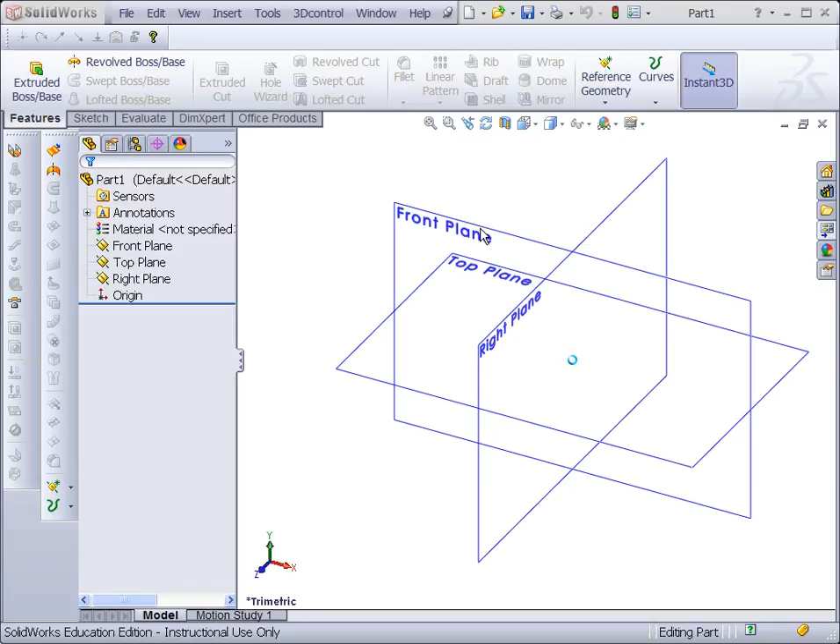In this video, I'm going to go through the process of creating the pressure plate for Lab 7 Sheet 2. We're going to start off by creating the model. I'm going to select the front plane, open an extrude on it. Then we need to draw two concentric circles. One's going to have a 128 millimeter diameter, and then the inner will have a 25 millimeter diameter.

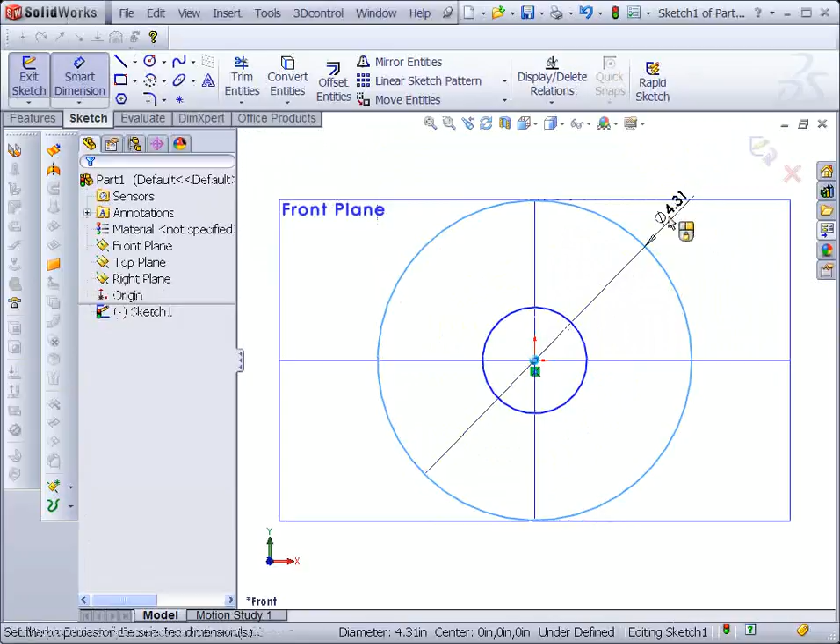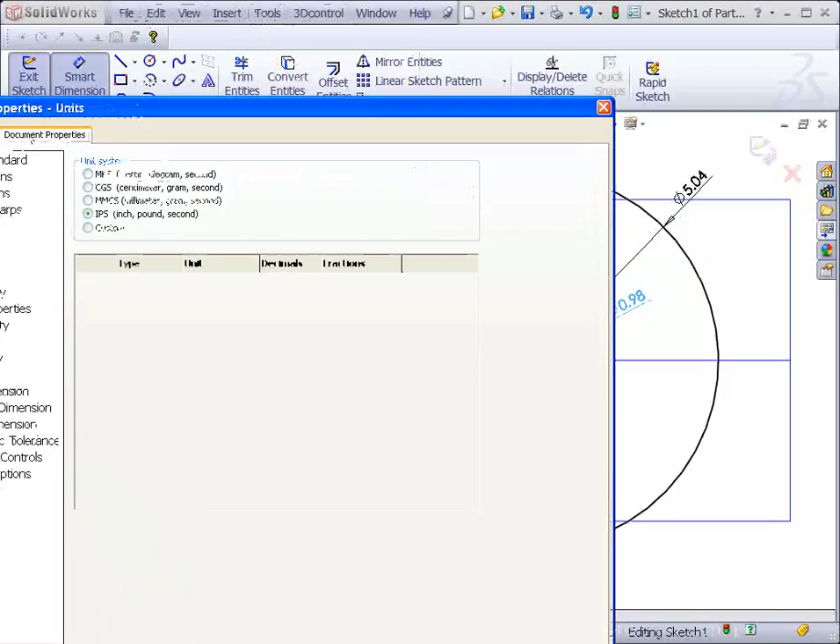So let's select that. Right now it says 4 inches. We're going to type 128 millimeters. Hit enter. This one we're going to do 25 millimeters. If we want to avoid that, we could have selected a metric part to begin with, or select Tools, Options, Document Properties, Units, and switch it over to millimeters.

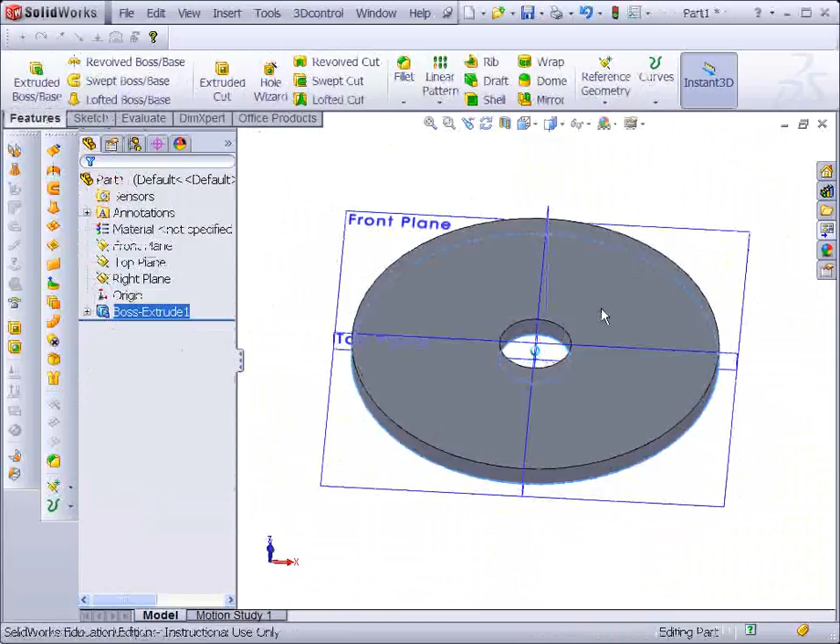So there I have my first part for extrusion. Select Extrude, set that height to 7 millimeters, and notice since I converted it to millimeters, now I'm in millimeters. The next thing I'm going to do is draw the support ridge that goes up through the center of the bosses. That's going to be an extrude. It's going to start on this top surface. Select the circle command again, and I'm going to draw the inner and outer circles respectively.

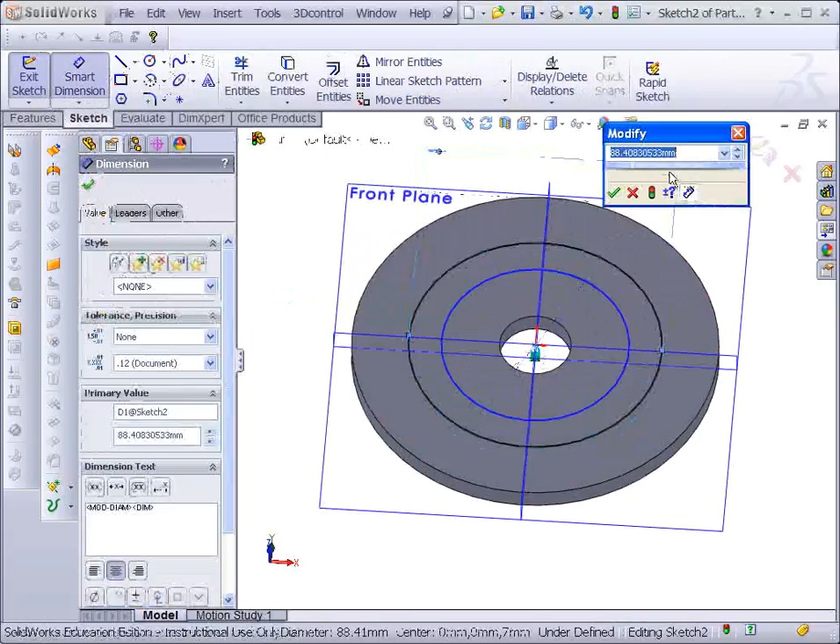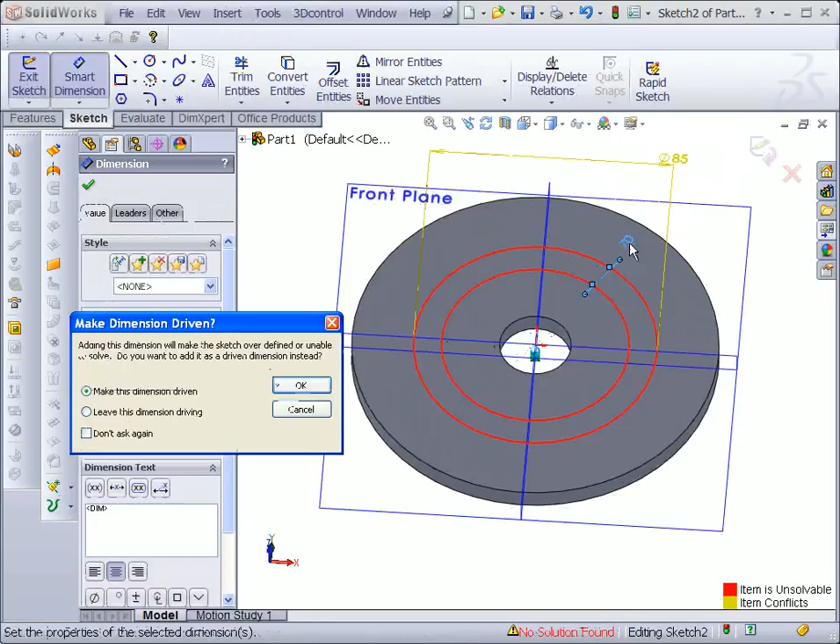If you look at your drawing, the outer one's the easy one. That one is 85 millimeters. The inner one is more difficult because it's given as a thickness, and that can confuse some people because there's also a bolt center dimension on your part. Now there I selected 70, which is incorrect. I'm going to hit cancel there, go back to the Smart Dimension tool again, and set up my distance between the two as 5.

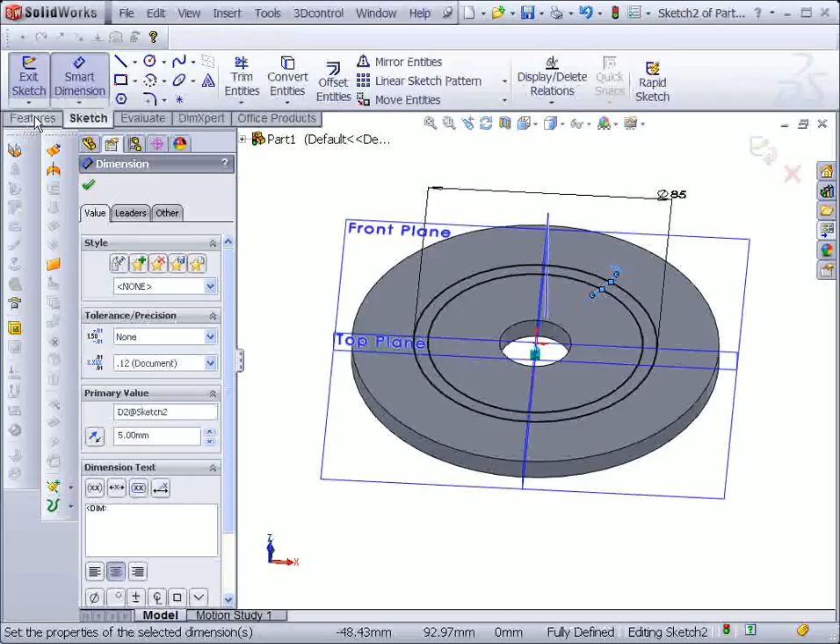That's correct now. If we look at our detail B on the drawing, you're going to see that the total height of this pressure plate is 37 millimeters. We're going to make an extrusion that's 30 millimeters high, since our base plate is already 7 millimeters high. So check OK. We've got that in place now.

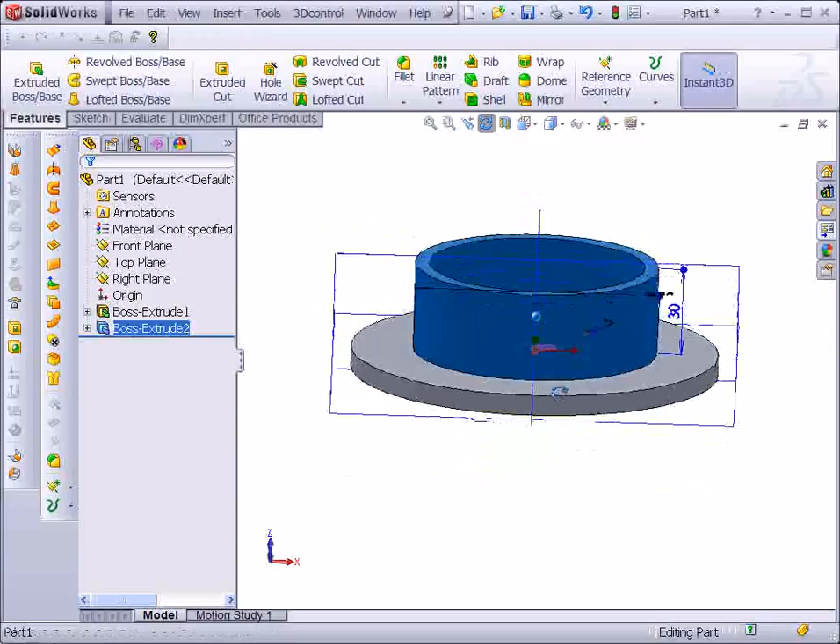That actually should be 12 millimeters. That's an incorrect dimension. So set that to 12. I'll hit the rebuild button. Now that's the correct height. My total bosses are 30 millimeters high.

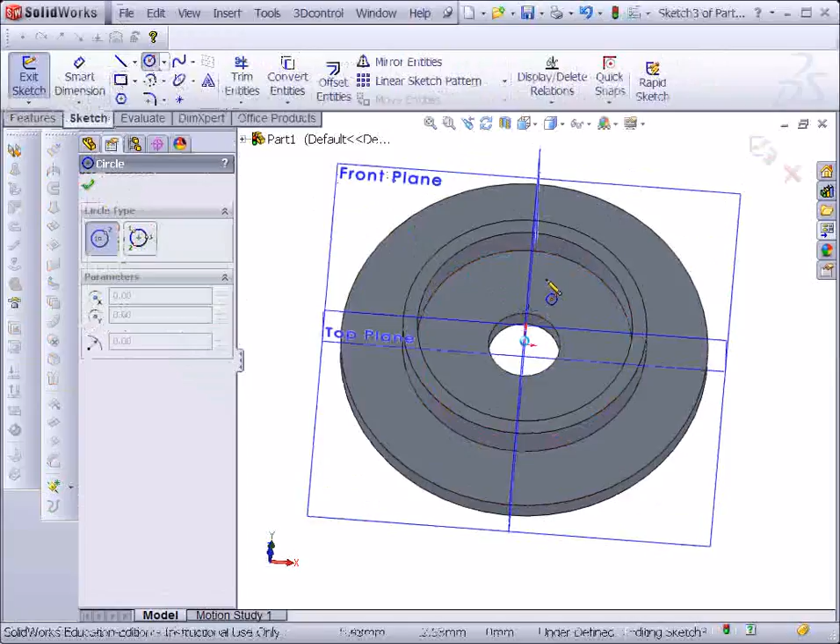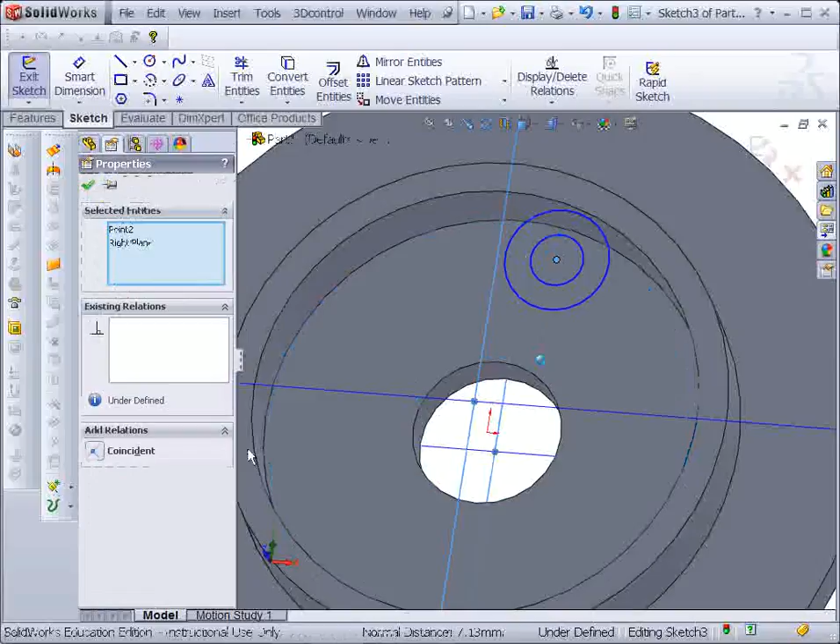Alright, the next thing I'm going to do, I'm going to go get an extrude again, select this face, and draw two concentric circles to represent the spring tower bosses on this pressure plate. I'm going to hit the control key and select the right plane. If you have the arc selected, it will make it tangent. So you want to have the center of the circle selected. Get the right plane selected, select coincident, put on our dimensions.

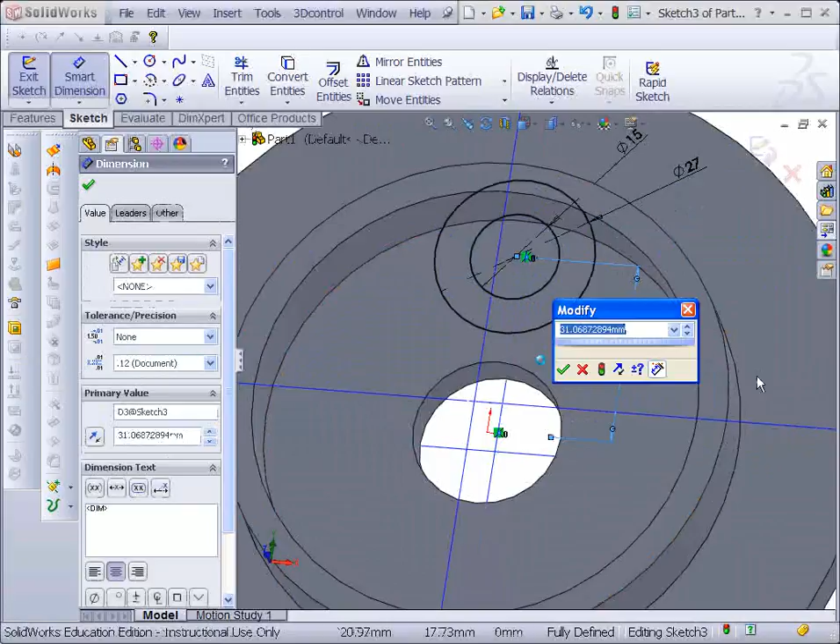Our through-hole dimension is 15, and our outer dimension is 27, and our center off of the plane is going to be half of 70, so that's 35. That gives us our location for our boss. So now that extrusion is going to be 30 millimeters high. So 30 millimeters is already in there. Check OK.

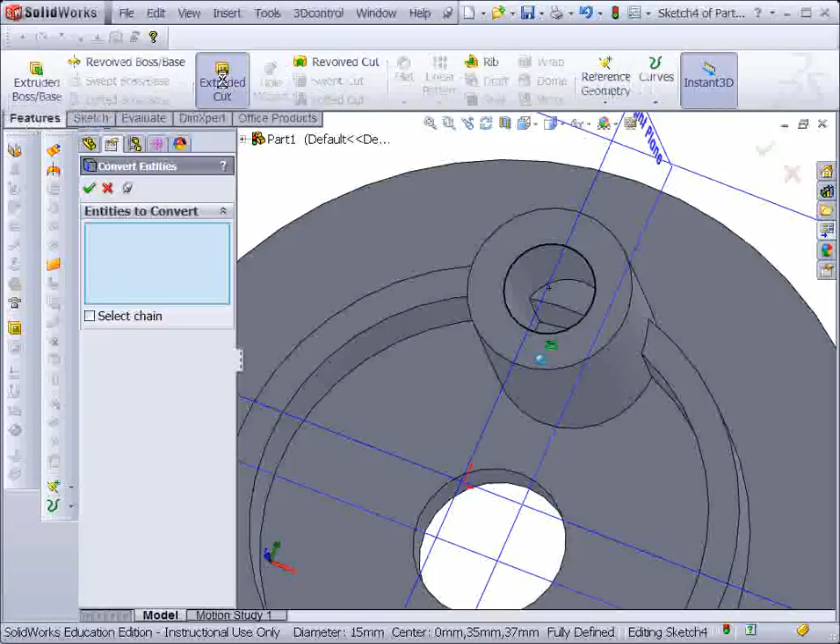Now if you notice, we've got a little bit of the support rim for the spring tower inside there. So I'm going to select the top surface, hit Cut Extrude. I want to use the Convert Entities tool on the inside edge. I'm going to convert that, do an extruded cut, select Through All under Direction 1, and now I've got a cut that goes through everything.

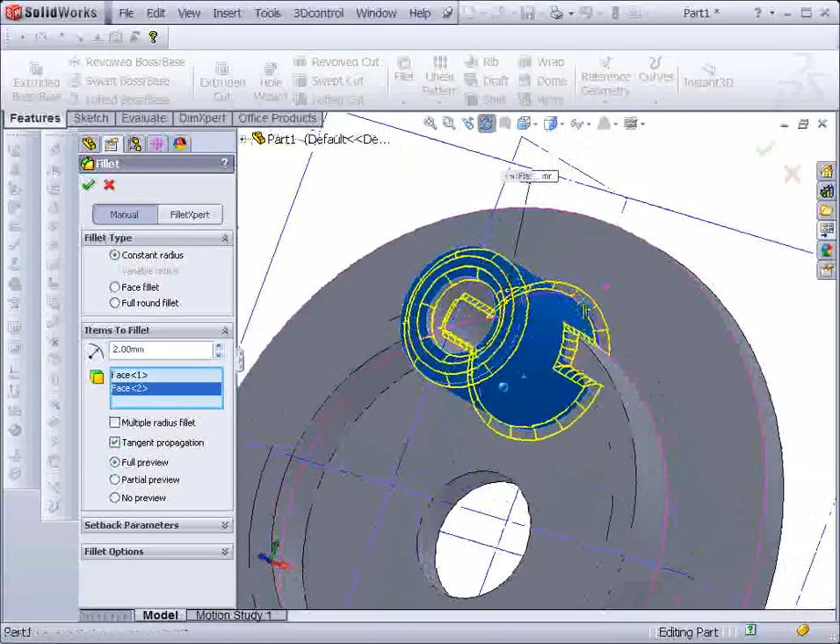The last thing I need to do with this is select the fillet command. I'm going to put a 2 millimeter fillet on the top surface and side surface of that boss. And then I will check OK. I'm also going to put a fillet on the top of this plate here. I'll check OK for that one.

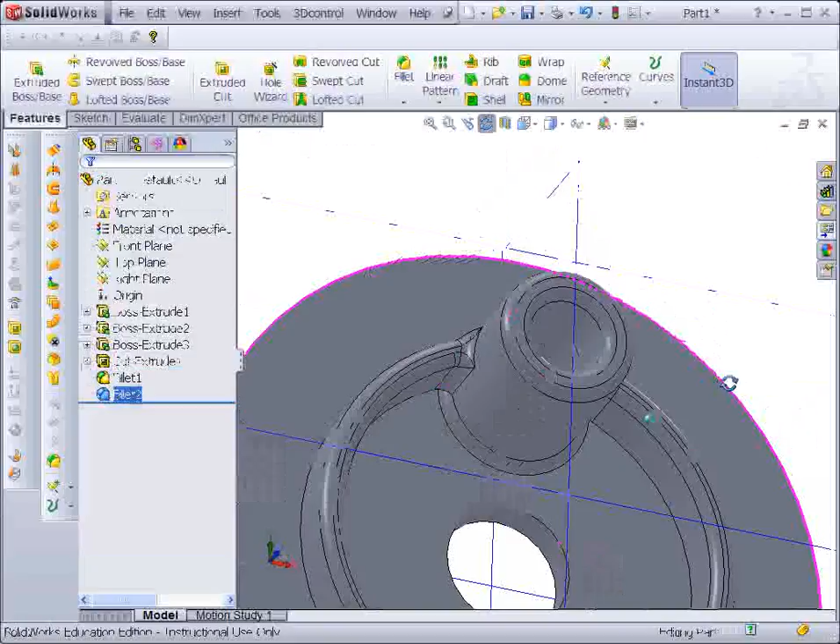Then I'm going to do a circular pattern. So I'm going to select circular pattern on the drop-down menu. I need to turn on my temporary axes. That gives me a center reference for this. I'm going to select equal spacing.

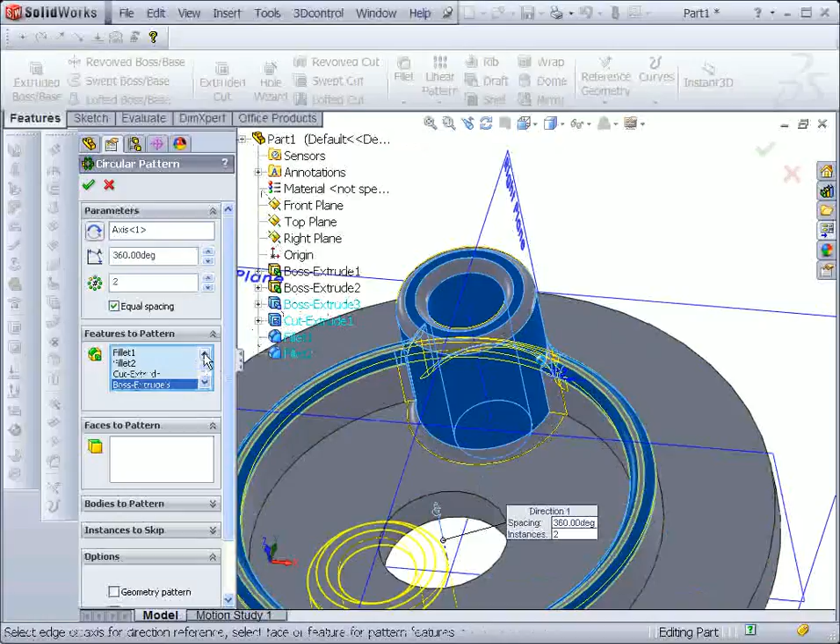In the part drop-down menu, I want to unselect that last fillet. Select the cut and the boss. And fillet 2 should not be part of this. Fillet 2. Then I want 6 of these. I'll check OK.

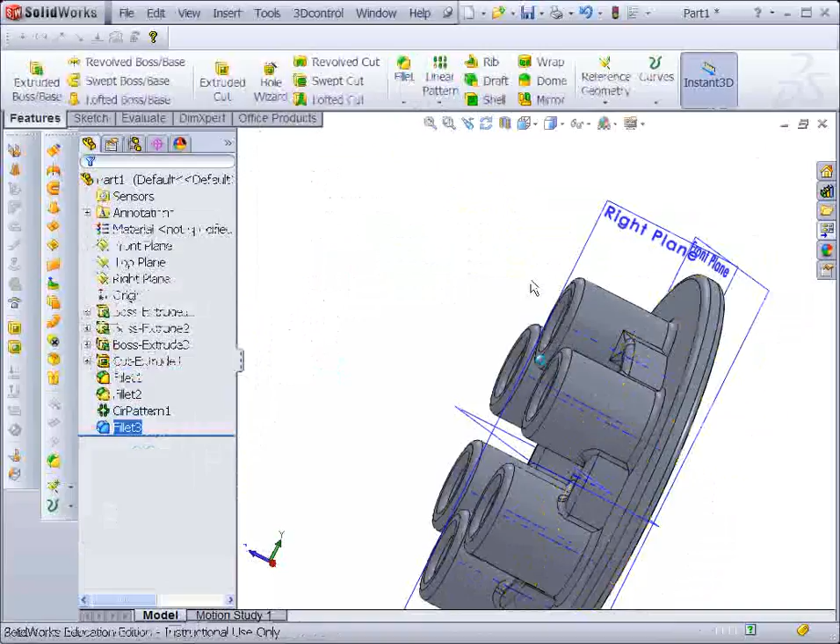And then the last fillets that I have to add to this are on the outside edges of the pressure plate. Select those. And at this point we're done with the model. The next thing I'm going to do, I go to File, Make Drawing from Part. I need to save this guy. I'm going to drop that right onto my desktop. You'd want to save it to your flash drive.

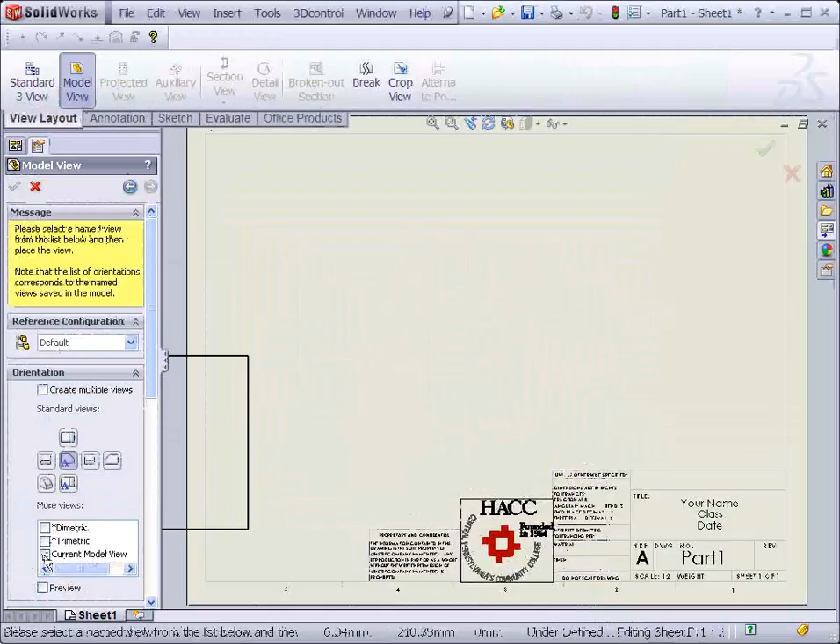Select my CAD 154 drawing template. I'm not going to use the view palette for this selection. I'm going to go Edit Sheet, Model View, double click on Part 1. I'm going to bring in the current model view. That's an isometric view that'll be up in the top. You can click on that and make sure I select the shading options for it.

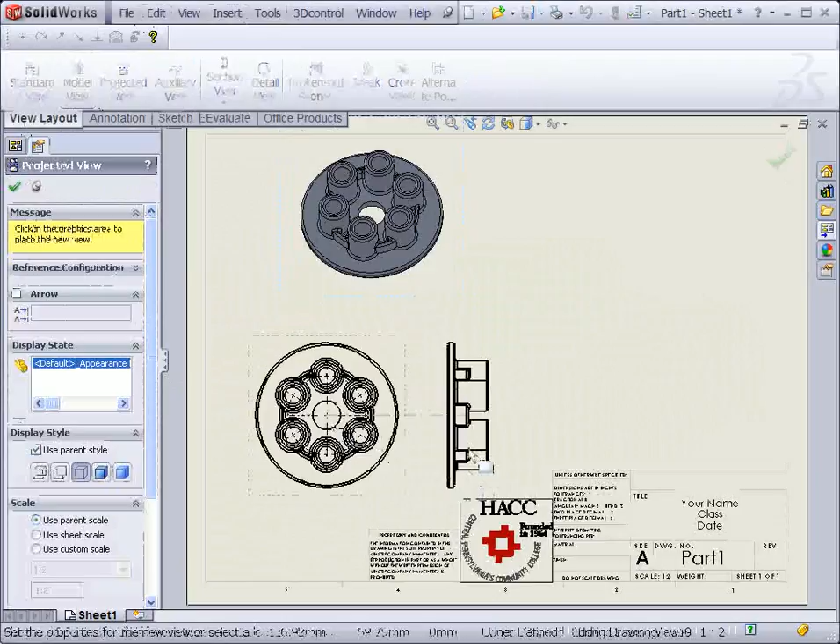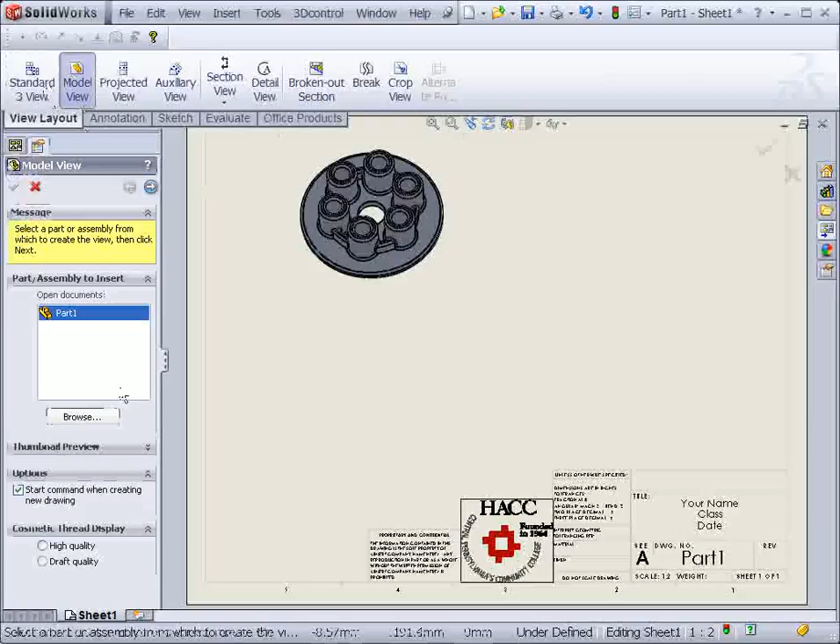Then I'm going to go to Model View again, double click on the part, bring in the front view, place that. Now my front view has tangent lines shown on it. I can delete that view, go up to Tools, Options, Drawings, Display Style, and under Tangent Edges in New Views, select Remove. Now if I go to put it in, those tangent edges should not show up. There you go. So there you got a nice clean drawing.

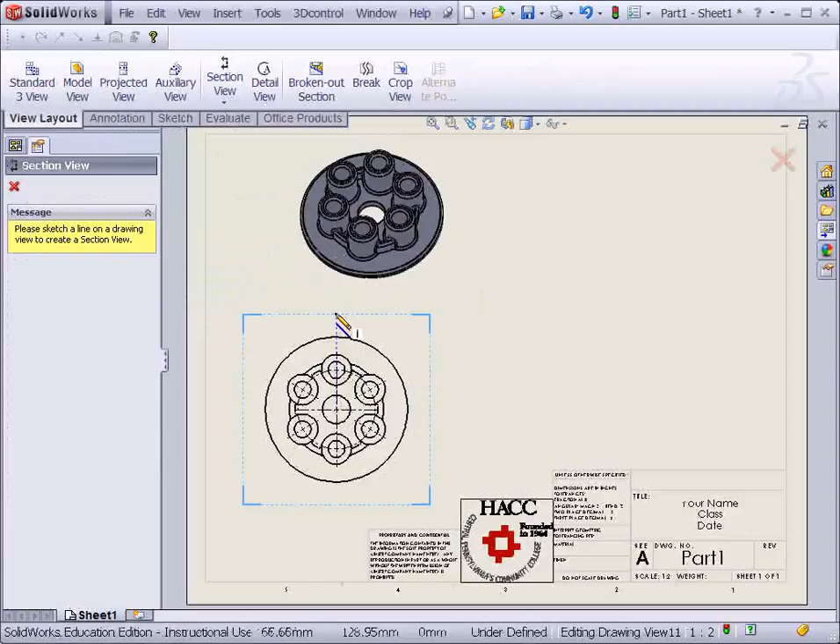Our front view's in place. The next thing I'm going to do is a section view. That's up here under the section view tool. I'll select that. Come down, pick up the center of the circle, then I'm going to go up, select, drop down, and create my section view A. Over here in the property manager, I can flip the direction of that. Check OK.

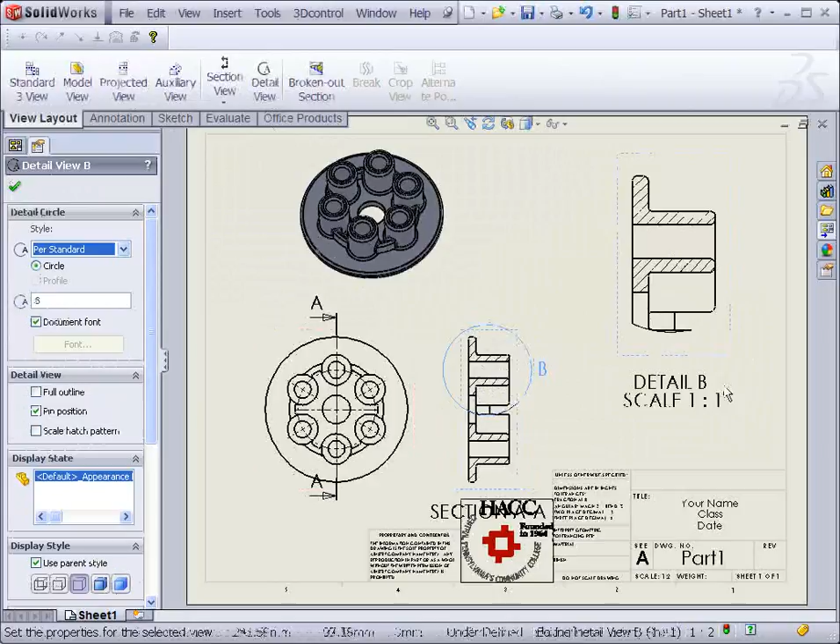Then I'm going to get a detail view. It's going to let me zoom in on just one of the spring tower bosses for this pressure plate. I'm going to place that detail view. We go back to Annotation, select Smart Dimension. Then I'm going to zoom in and dimension the different features I have here.

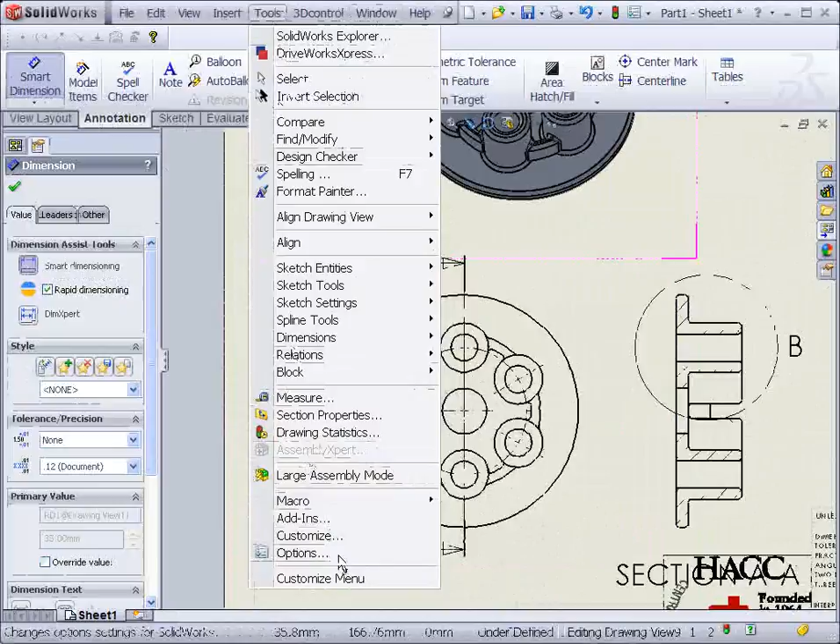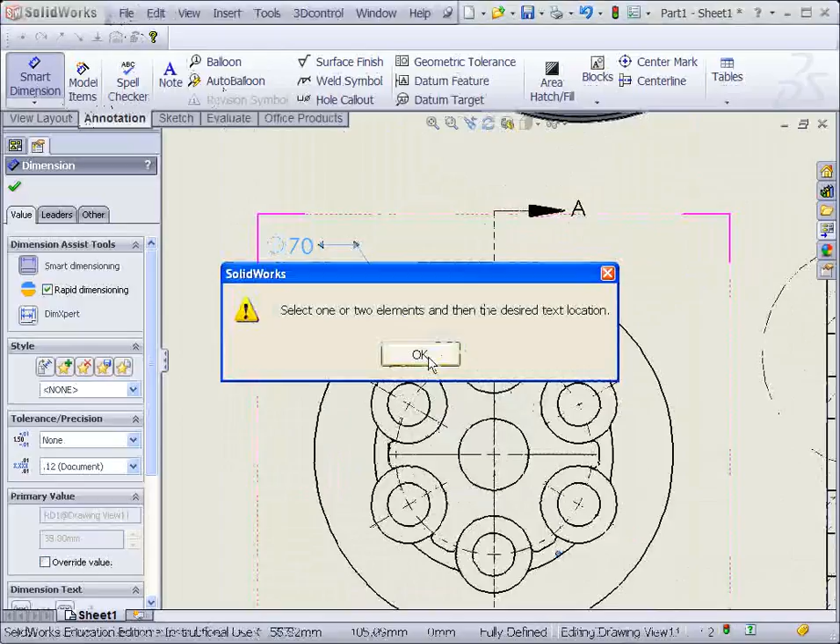So my dimensions are showing up in ISO format. To fix that, Tools, Options, Document Properties, switch this to ANSI. You can also switch this to display as diameter, so that matches that one on our drawing. My Smart Dimension tool is still open. Zoom in, select this arc, come up, and for that one, that's our 85. Display that one as a diameter.

The center, that one I'm going to add a note to, just saying that that is a through dimension. I don't want the leader line for that to be on top of my section line. That would be poor etiquette. I'm going to select the inner diameter there and put my times 6.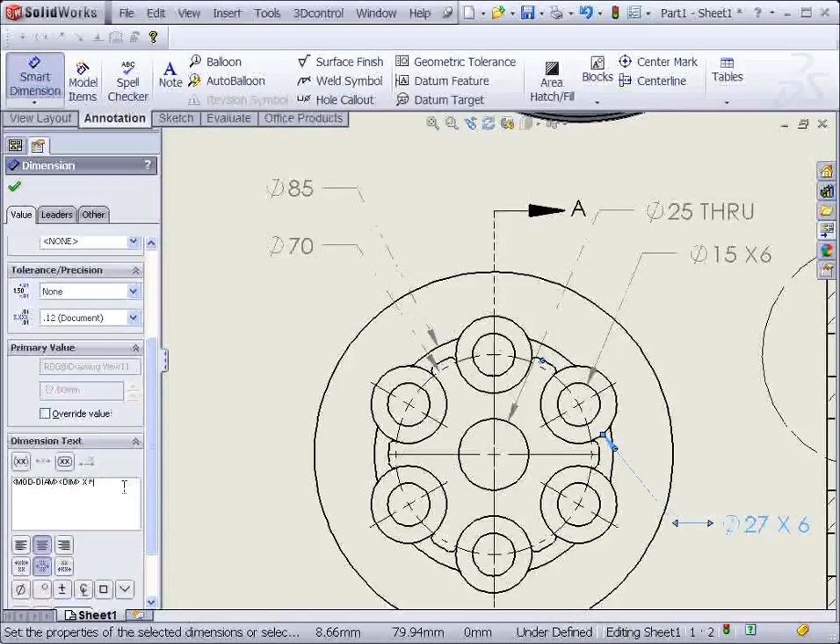And then the outer diameter of our boss, we select our 27. That also gets a times 6. The last one I need is down in this corner. That's the thickness of the rim. I'm going to place that dimension.

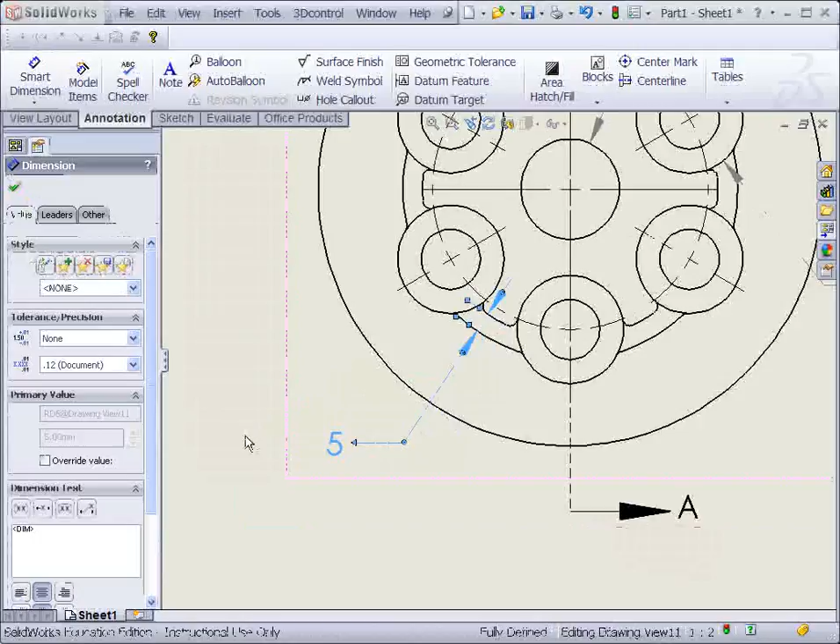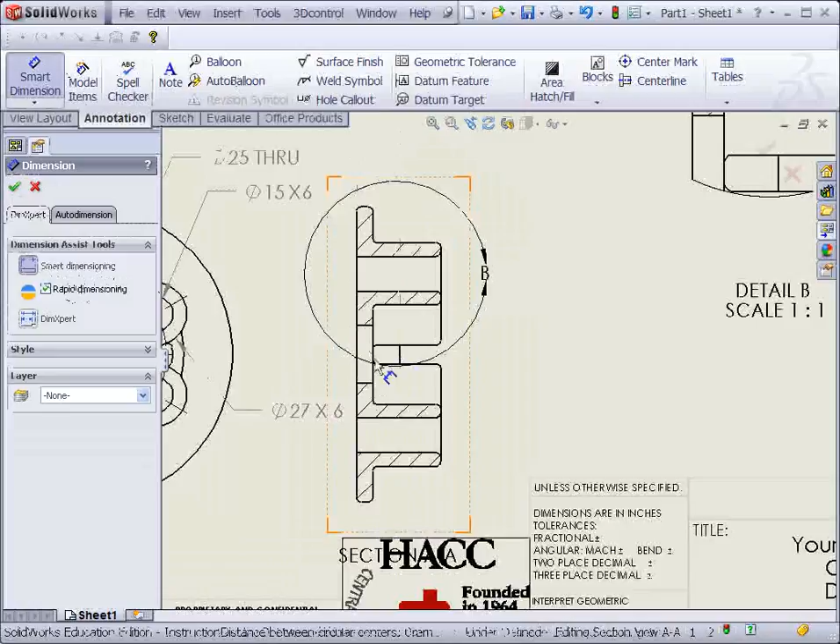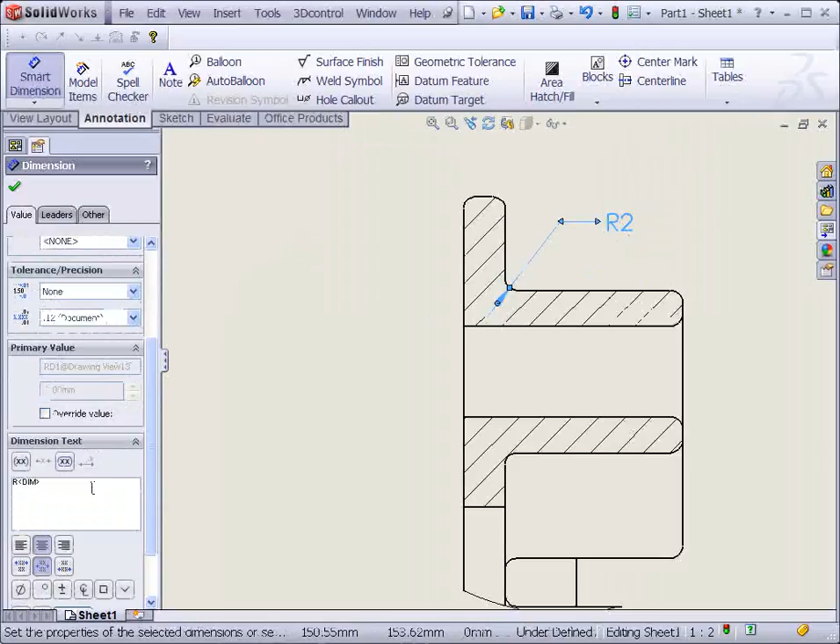Then I need to show the dimension for the height of the center rib, and that's showing up as 19. I'm going to change my selection on that. I didn't get the right edge, so we'll get that one, there's my 12. Come up to my detail view up in this corner, pick up my radius, add my typical note for that. Don't forget the space.

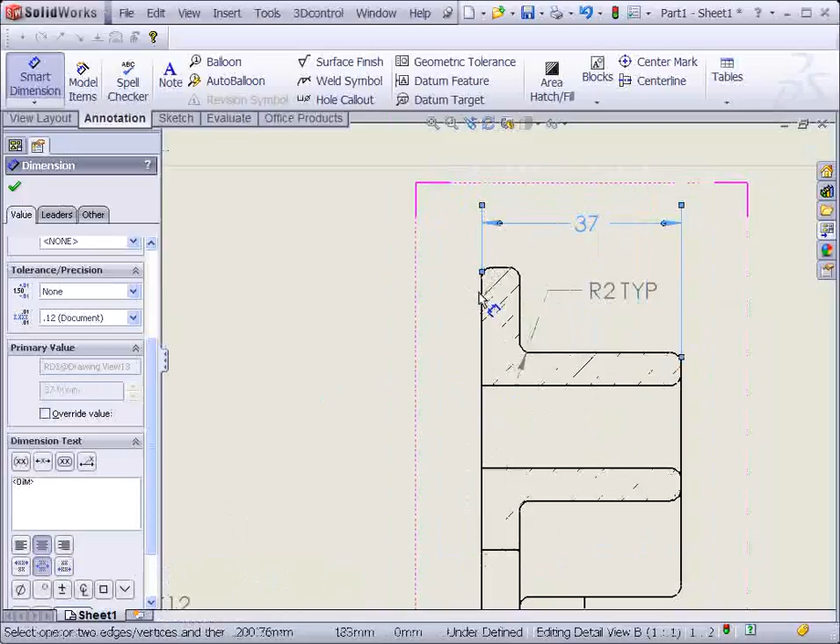And the only other dimensions I have up on that view are the overall height of 37, so that should show up as 37. And then the thickness of the pressure plate of 7. Alright, so that should be all of the dimensions on the part. You're going to want to save that as a PDF file.